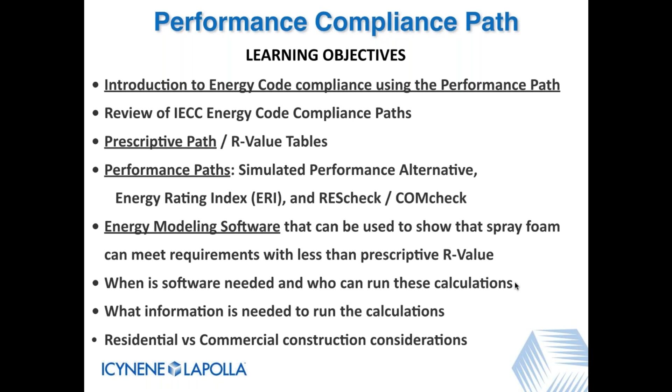And then at the very end, we'll just look at residential versus commercial construction considerations as far as performance evaluation and those type of things. So that's where we're heading today. All right, so let's get started.

This is all about a legal way to meet energy code requirements at R values lower than the prescriptive values. And all we mean by legally is that there is a code compliance path to do that. It's not a matter of, gee, I think R20 is good enough, let's just do that. But this gives us a code compliant method to do that.

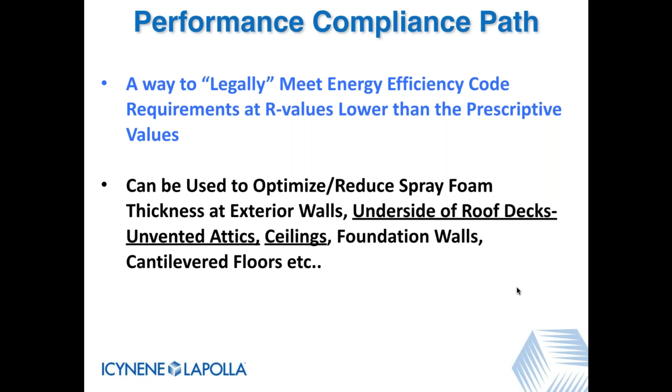And it's very clear in the codes, which I'll explain as we go along. The performance path can be used to optimize or reduce spray foam thickness at exterior walls, primarily underside of roof decks and unvented attics and ceilings. That's where the high R values are. Foundation walls, cantilevered floors, and so forth. So we can look at doing trade-offs based on the air tightness that the spray foam gives us for the overall performance of the building.

All right, so one of the things I want to get started with is I get a lot of calls, or I get these type of conversations that the code officials are told that R20 spray foam performs the same as R38. That is not true from an R value standpoint. That chart, although I wish it was there, does not exist currently.

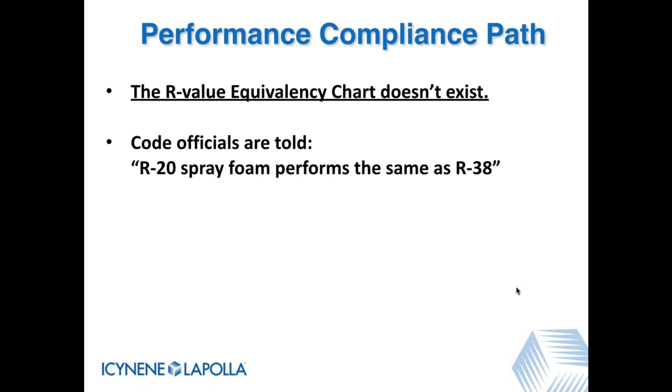And the reason for that is R value is R value. It's based on a specific test, ASTM C518, which is the standard test method for steady state thermal transmission properties, or as many of us in our field call it, the guarded hot box. That's what it's based on.

The key thing to note about when they're looking at this test and running the various products through it, the test does not account for air leakage. So we, in the spray foam industry, the air tightness industry, do not get any credit for the air leakage, the enhanced performance that building air tightness gives us. So again, R value is R value. We have to prove that through these various methods under performance. So that's a big part of what we're heading for today.

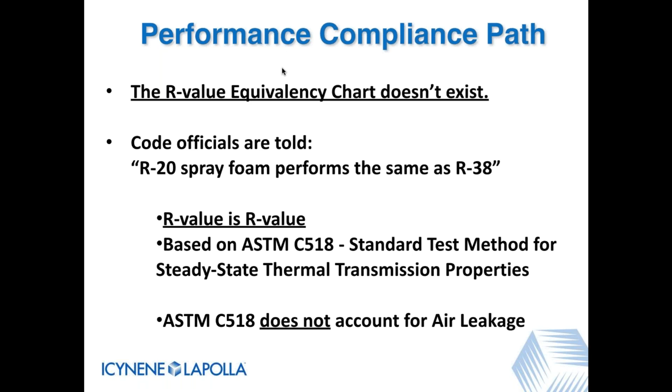Couple things, the IRC Chapter 11 and the IECC Chapter 4 are really the same documents. They came together in the 09 code. They were different charts and different R values, which was a real problem in the code. So anytime we're talking about the IRC Chapter 11 or the IECC Chapter 4, they're essentially identical sections. They're just different code bodies. So that's an important thing to look at.

So now we're going to kind of compare them. What's been happening? The 2009 codes took a jump, about 15% more stringent than the 2006. Basically what happened in 2006 is the Department of Energy decided to come up with this 50% rule where they were going to try to reduce the energy consumption of buildings based on the 06 code by the year 2015, that it would be 50% less energy needed. So that was the goal.

So the codes have progressed along 2012, 15, and 18. They're about 30% more stringent than 2006. So we're not at the 50% solution is what it was called, but we're getting there. And we'll kind of go through the prescriptive charts in just a moment so we can see how that works.

Now, the other thing that's really important is when you look at the IRC Chapter 11, the IECC Chapter 4, those are model codes. That's what the DOE and ICC puts out saying, okay, this is the template, this is where we start. Then what happens is that model code is brought into the state and local jurisdictions, and it goes through a committee process and politics and different things. So typically the model code is almost never adopted exactly the same as the model code. So the state code and local codes are different.

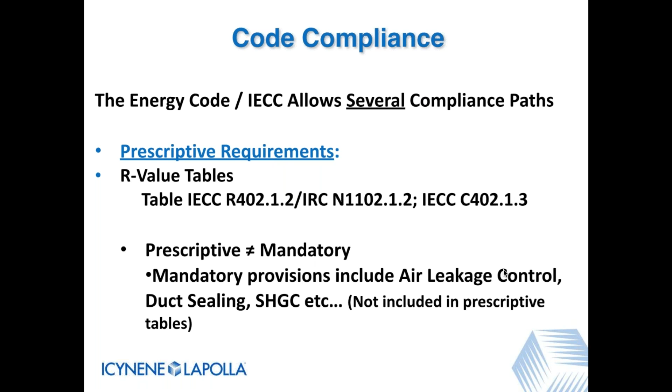Each state will have maybe a different set of numbers, but there will be a table for prescriptive requirements. The other thing to note is prescriptive requirements don't exactly line up with the mandatory provisions, which are not on the prescriptive tables - things like air leakage control, duct sealing, solar heat gain coefficient for windows, etc. There's a whole list of mandatory things that have to be met in addition to prescriptive, and that's important. Just because you meet the prescriptive requirements doesn't mean you're in compliance, especially in terms of air leakage control.

Right now we still have 2 states on the 06 code, and 8 states either have an older code or no statewide code at all. So that's just kind of a jump on that. That's where that characteristic comes in.

Spray foam house - we know that a 1.5 ACH50 house, the energy performance is far superior compared to a conventional fiberglass house that is around 10 ACH50, very loose, back in '06. That's about what we saw as sort of an average, and it's due to the increased air tightness, not so much the R value, but the air tightness.

In the 06 code, mechanical system trade-offs are allowed in the performance compliance path. We'll look at that a little bit later, but it just means that back then, if you put in a higher efficiency HVAC system, you actually got credit for it, and you could trade that off for R values, i.e. lowering R values. The other important thing is that 2006 is the base code level for future revisions of the code. So everything started with 06, and then we start ramping the codes, getting more energy efficient.

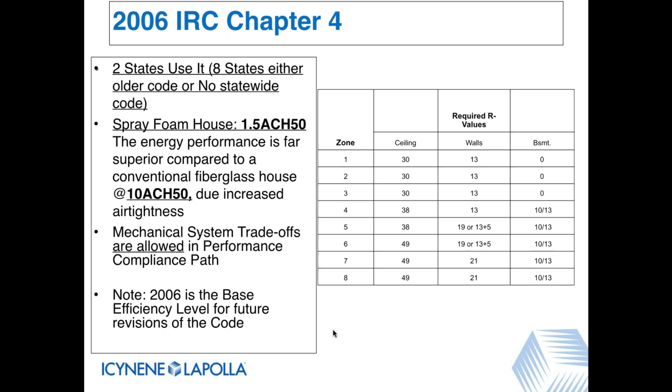So 2009, Chapter 11, under the IRC, or IECC Chapter 4. Again, basically the same documents, just in different code bodies.

14 states are currently on the 2009 code, which called for a 7 ACH 50. We know a 1.5 is still performing much better, so we had some good trade-offs based on air tightness. Back in '09, and in some codes still currently, a blower door or a visual inspection was allowed to determine if they hit the 7 ACH 50.

Visual inspections were there sort of to placate everybody. People were afraid of blower doors. They were expensive, they didn't understand them. They thought they were $900 to $1,000 a piece, which they are not. They're typically $250, maybe $300, depending on location. So visual inspection was allowed.

So you had your option. You could go around and look at it once or twice during the construction process and with a magic wand say, okay, it meets a 7 ACH 50. Not very empirically correct, but it was allowed.

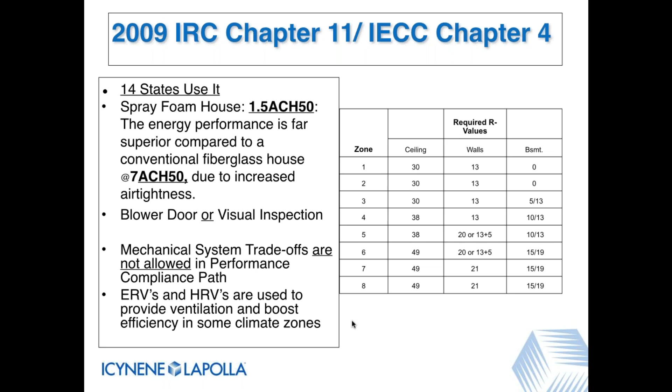Mechanical system trade-offs now are not allowed in the 09 and today's codes in the performance compliance path. ERVs and HRVs are used to provide ventilation and boost efficiency in some climate zones where appropriate. There was no mandate for mechanical ventilation in the 09 code.

Then we get to the 12 code. We start changing things — 8 states currently use it. Air tightness levels lowered or decreased. We had 2 numbers really to work with between zones 1 through 8. The warmer zones were at 5 ACH 50. As we got into the more northern climates, 4 through 8, it was 3 ACH 50.

Blower doors were then required on all houses. Again, that's model code, not necessarily state. We still have some state codes on the 12 and 15 that are not mandating blower doors. So again, check to see what that regulation is.

R-values definitely increased. You can see these here, especially in the ceiling, going from an R38 — I think it was climate zones 4 and 5. We also had the walls increasing from 13 to 20, or 13 plus 5, that is cavity plus continuous on the outside.

Spray foam, at this point, since the requirement for air tightness made fairly tight buildings — not super tight, but pretty tight — it's all about, let's use spray foam because we can get there quicker. Time and detail, i.e. money, was required, so it put us in a much more competitive stance versus a fiberglass house that had to do a lot of extra air sealing to get down to these lower levels.

Mechanical system trade-offs still are not allowed. At this point, mechanical ventilation is required. The key number is 5 ACH 50. The code doesn't actually label that, but because the loosest building under this code was a 5, and this code required mechanical ventilation, that really meant 5 is sort of the line in the sand — if you got tighter than, or up to 5 or tighter, then mechanical ventilation was required. So it depends on what zone you're in, and again, what state and local jurisdiction accepted that and what they had in their books.

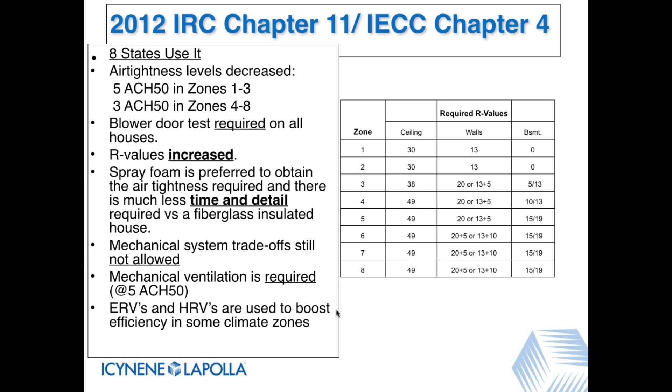ERVs and HRVs were used to boost efficiency in some climate zones, again as part of the overall system. With the 15 code, we've got 17 states using it, same air tightness levels, pretty much required in all houses. That's good. Our R-values did not increase — that's also good. Spray foam, again, preferred because of the time and detail, that's the cost effect required by fiberglass houses to get them anywhere near a 5 or a 3. Mechanical systems still aren't allowed, and mechanical ventilation is required.

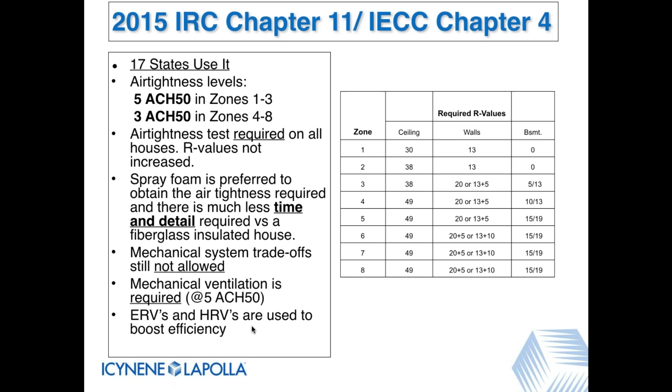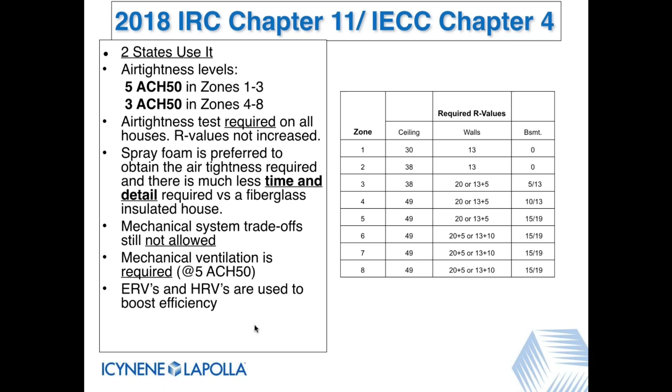ERVs and HRVs are all part of the house as a system. In the 2018 code, not a whole lot of changes. There are 2 states using it — I think it might be 3 now. I couldn't get that confirmed, but as states go on, we're going to be seeing more on the 18 code. It doesn't change a lot from the 15, and that's a good thing.

So, the performance path. It gives us the option under these sections, i.e. section R405 or N1105, which is known as the simulated performance alternative. This is another way to go about it. If you meet these requirements, the building complies with the energy code.

Okay, so the main part of this section is right here. Proposed design shall be shown to have an annual energy cost that is less than or equal to the standard reference design. The standard reference design is a building based on the prescriptive tables N1102.1.2, R402.1.2.

So you run the proposed design, that's the spray foam house with the tighter envelope, through the simulated performance alternative. And if indeed the energy cost is less than or equal to the standard reference design, that is the prescriptive house, then you're good to go.

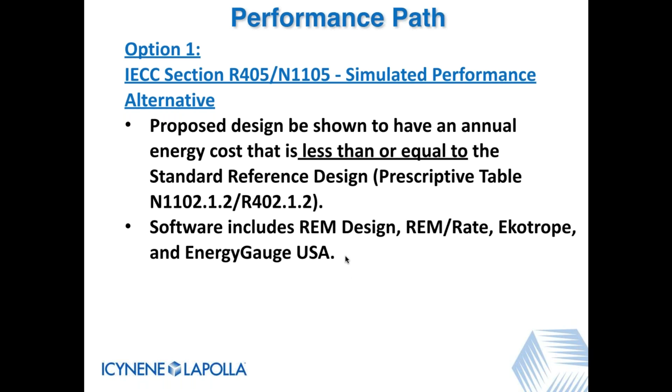There's a lot of different softwares out there. One is REM Design, there's another one, REM Rate, there's Ekotrope, and there's Energy Gauge USA. So those are 4 programs that pretty much universally are accepted. Not in all cases, but for the most part, we do see acceptance by the code officials.

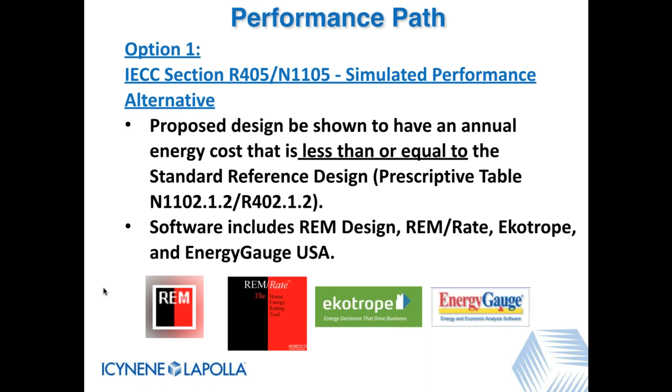They're familiar with it. As most of us know, especially in remote areas, some of the code officials are not quite understanding performance path and computer programs and so forth, but it's getting better. These do comply with the requirements set out under the DOE and the ICC as far as programs that can be used to show compliance under the simulated performance alternative.

Okay, so here's what we're going to talk about, and this is really where it boils down. The computer modeling accounts for the spray foam's lower building air tightness, so its benefit can be realized. So it does factor into the calculations. That's very good, that's very important.

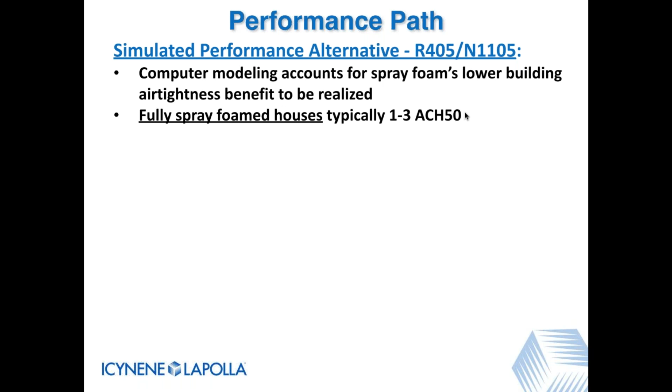And we know that spray foam houses typically come in around 1 to 3 ACH50. Those are homes that have either 6 sides of foam or maybe a slab on grade with walls and ceilings foamed. So we know that's very doable.

Unvented only applications, say in a retrofit, or if the builder or designer decide just to do an unvented attic to keep the ductwork inside the building but use conventional insulation in the rest of the house, then we see roughly around 3 ACH50. It does vary, but certainly it still can be a very tight building, especially adding in that unvented attic assembly.

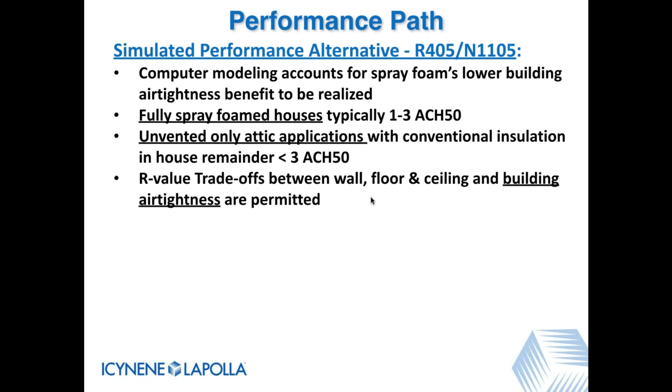R-value trade-offs between wall, floor, and ceiling and building air tightness are permitted. So if we have a tighter building, we can lower the R-value in some of these components, as long as the energy cost is the same or equal to the prescriptive design.

Mandatory energy requirements still apply, so you don't get away from that. This is the other part, and there's a whole list of them, I think we'll show that on one of the slides, the type of things that are mandatory, but they're important, so they all have to be met. This is a biggie.

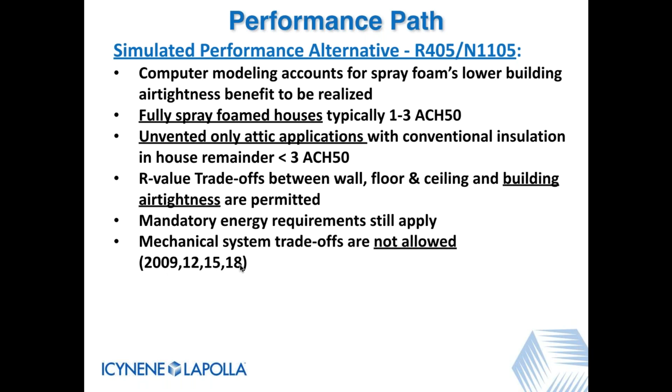Mechanical system trade-offs, as I've said before, are not allowed from the 9 through the 18, including now the 21, which is still in progress. So you can't use a higher efficiency furnace or air conditioning system and get credit for it as a trade-off. The reason for that, it's kind of a goofy thing, but there's a prevailing minimum federal HVAC efficiency in the books. And so the codes are not allowed to require anything above those.

I think the AFUE, as far as furnace efficiency and boiler efficiency, is 81, and I think SEER is 13. So what it means is that you put the same efficiency for the standard reference design and the proposed design, so there's no credit allowed. It becomes a level playing field. So keep that in mind.

That's one of the things about performance. Even though the builder is going to use a very high efficiency piece of equipment, there isn't any energy credit given for that in this particular approach.

One of the things that is needed, builder certification, is typically required. In other words, the builder goes back out after the house is built, looks at the building, makes sure that it complies with everything on the alternative that was designed, and signs it off. So there's a liability transfer to the builder saying, yep, we did all of those things. We should be in compliance, and for the most part that's what the building code officials want to see, and that makes it work for everybody.

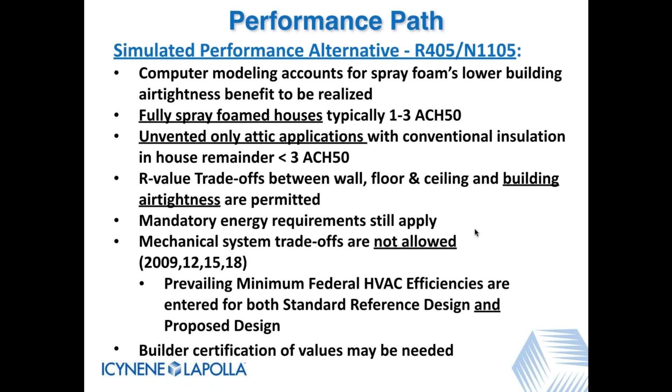All right, so performance path, we need a lot of info. It's a very detailed thing. I've done quite a few of these. In my earlier life, I did hundreds of these as an energy rater back in the 80s, and it's pretty detailed, takes a lot of time, but that's a good thing. It's a complete construction set of drawings and project specs.

Elevations, floor plans, there's a takeoff on the building envelope areas, making sure that, you know, in R value for the walls, we get all of the wall R value, and making sure you've got everything that's accounted for in the plan. So the plans, the complete part is very important. Proposed insulation levels of each component, floor, walls, and ceiling. Predicted building air tightness, this is what you're shooting for.

So if we're going to run a 2 ACH50, a very tight building under the blower door test at 50 pascals, then it's a big part of that calculation. Fenestration specs, U factor, solar heat gain coefficient, etc. Those are part of it.

Project orientation, how it's facing, north, south, east, or west on the particular building, or if it's in a development, it's the worst case. Typically where the most amount of windows face north, and as long on this proposed design, and if indeed it passes that, then the building code official knows that the other orientations are going to be better. So there's sort of a do one rating, make sure the buildings are all the same, if you may, but that orientation is a big deal when it comes to looking at performance calculations.

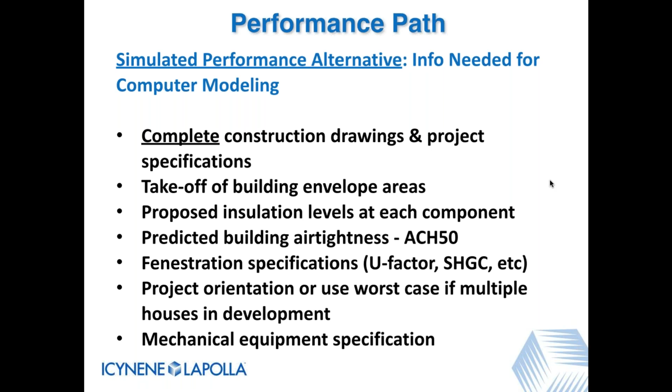You do have to put in the mechanical equipment, that's part of the equation, but again, with this particular path, there really isn't any credit for it as far as the calculation behind it. It is entered, but it is not credited. So here we have a computer modeling to demonstrate the path. This was done, I think, back in '18. This particular building's in Albany, New York, which I think is climate zone 5A.

And this is the mandatory requirements that we talked about. These are the things that have to be done regardless of the R values. And as far as compliance, the things they look at are heating, cooling, and water heating. This is where the line is. So as designed, this would be the spray foam home. This would be standard reference design. As long as this number, 1729, is less than 1804, which it is, then this house would comply.

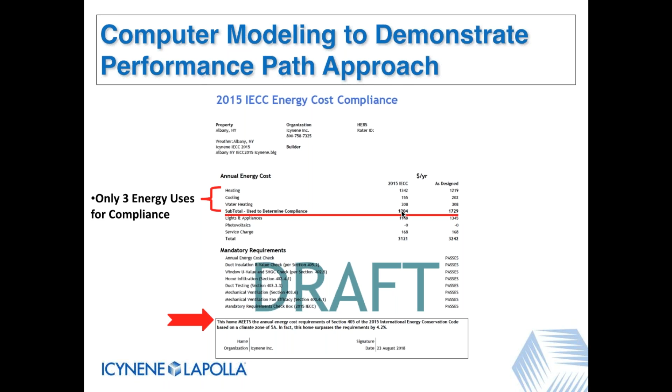There's another one that I got in from Performance the other day. It's a group we work with out of North Carolina for computer modeling and home energy ratings and a lot of other things that we look for. This particular home, walls were R13, roof R20, and this was a 2 ACH50 house. Pretty tight house, which is good. And again, you can see sort of small, but the subtotal used for compliance, this number, 1001, is less than the other by just a little bit, 1005. But that's all the code requires, equal to or less than.

And then this is the statement you're looking for. Design exceeds requirements for the North Carolina 2018 performance compliance by 0.4%. It can be 0% as long as it's the same. And these are the requirements that are needing to be met. So someone needs to check all of these off and make sure that in addition to the R value requirements and the air tightness requirement, other things need to be met.

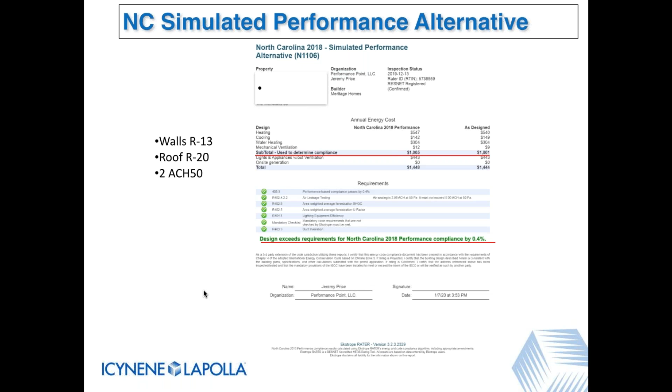And this is done in a program called Ekotrope Rater. It's a web-based rating system that's out there. It's fairly new. It's one I've been trained on, both REM/Rate and Ekotrope Rater, and they seem to give you pretty similar results. Now, one of the issues that we have to kind of look through is, okay, great, now we need to do this. How do we find someone who can do this type of calculation work?

The first one we would call on would be a RESNET rater, which is a HERS rater. There's the RESNET network that you can Google. It has a finder, a locator of where the RESNET raters are based on location. So you can contact them, find out if they do it. I always think it's a good idea for our dealers to team up with various RESNET raters, work as a team. You provide them some work, if you may, and back to you from them. So it's a good relationship, and a lot of our dealers do use HERS raters for the compliance path.

Now they can either run, as we'll see in a minute, a home energy rating, or they can do the performance calculations under simulated performance. Not all of them do both. Some do, many do. It makes sense that they're a multifaceted company. Then you also have, separate of that, building envelope consultants. These are just companies that specifically work on building envelopes, or energy consultants.

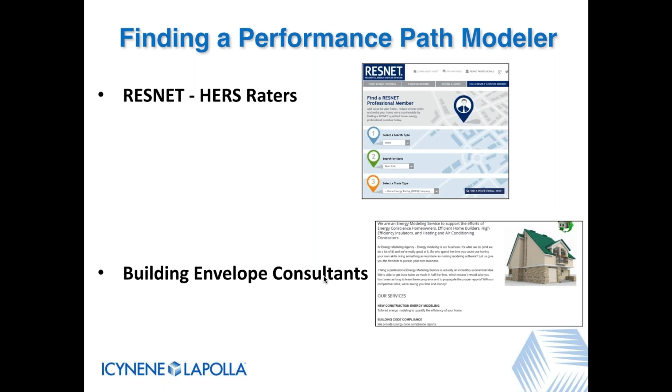You can Google either one of those for your area and find out who might be available to do that kind of work. So as far as finding one, these are just a couple I put up that we're aware of.

That's an assistance for the builder, and something that I think, because we're definitely in the energy business, we should be able to have some information. So these are things, as you look at using a performance path to comply with the code versus prescriptive, these are companies that can run those calculations based on code compliance.

Another opportunity or option is the state code energy offices. They have a list of companies. Typically, you kind of have to dig down into their website. Sometimes it's difficult, or you can just hopefully contact them through an email and tell them what you're looking for. And typically they'll have a list of companies now, and it's getting better and better, of who does these calculations. So there's another avenue to find out what's happening.

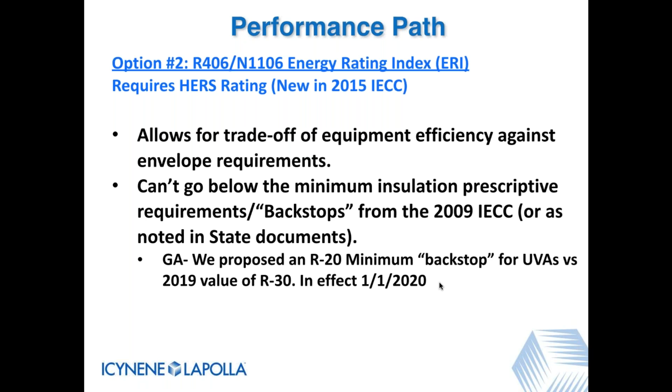In Georgia, when they were going through their code, now in effect as of 1/1/20, we proposed and were successful at pushing through an R20 minimum backstop for an unvented attic or cathedral ceiling, versus the 2019 value of R30. Our dealers said, well, we don't want to go to an R30, what do we do? So we got it through the code. It's about a year-long process with many meetings and a lot of politics, everybody fighting on their side of the equation or not. But we did get it through Georgia, and that's now in effect as of 10 days ago. So that's a good thing.

North Carolina has basically the same code change proposal. Right now it's passed all the committees and is going through what they call financial impact review. I believe we'll be fine with that, but we've gone through all of the politics already. Now it's a matter of people crunching the numbers to see how that affects the overall building and the homeowner, since everything out there is meant to protect the homeowner and building owner to make sure they have an energy efficient building. So Georgia, North Carolina, and hopefully some other states we can get there too. We dropped that backstop from an R30 down to R20, and the same thing in North Carolina. That's good news for our dealers, it makes us more competitive versus typical fiberglass or cellulose projects we're looking at.

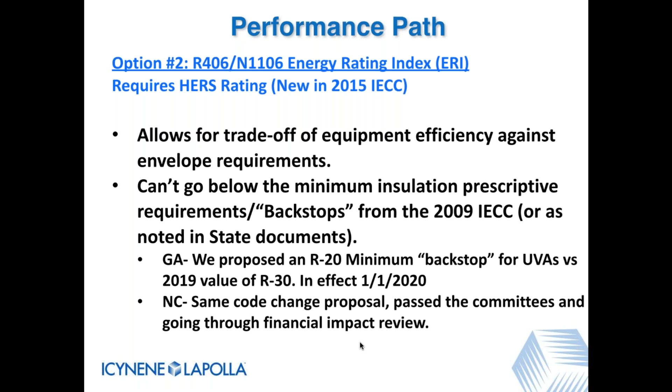So the ERI, or HERS rating, requires a detailed energy rating be performed. The energy rating can be done from plans, that's called proposed. So before you even start, you can do an energy rating and tweak the numbers to make sure you get it below that threshold number. I'll talk about that in a minute, the actual index and what it means. But it's required to be third-party verified, which is where the HERS rater comes in.

So you do it proposed, then go ahead and build it. If everything comes out right, especially the air tightness, it has to be verified by a third party, so there's a blower door test and a duct blaster test if needed. Duct testing is not needed if we have an unvented attic, because in that case the ducts are inside the envelope.

That's another little bit of a cost trade-off that's not required with an unvented attic, which is a good thing for us. So again, that's the most important thing proposed. As you go into the project, the design comes in, you know it's going to pass as long as all the air tightness is there and all the other components.

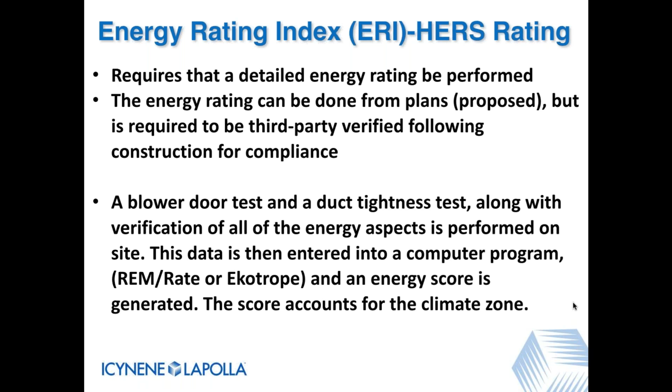And then the HERS rater will again do a post-construction compliance rating, and as long as it meets all of the conditions, you're good to go. The data is then entered into a computer program, again it can be REM Rate or Ekotrope right now. Those are the two main programs used by HERS raters, and there's a variation of both. Some use one, some use both, some use the other. An energy score is generated, and the score does account for the climate zone, so the different climate zone numbers and different ratings.

So here's where it kind of fits in. Just so you understand where the path is, the numbers: a score of 100 means that the house used the same amount of energy as a house built in 2006 under the IECC. So 100, no change - none of the states have adopted a score of 100 for compliance. And then the other end of the spectrum, a score of 0 would be a net zero house. You probably hear a lot about net zero houses, typically with a solar panel to make up for the energy that you have to use for most of your electrical.

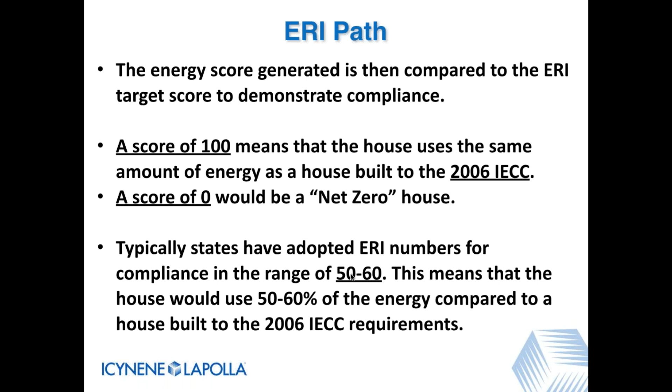So 0 to 100, that's the range. And what we know is that the states typically adopt a number. There are numbers in the model code based on each of the climate zones. However, the state itself, which I've gone through many times, will adopt some other number. Most of them are in the range of 50 to 60 as far as the index number. The name of the game is to get the index below whatever number is stated. So if it's 50 or 60, it means the house would use between 50 and 60% of the energy compared to a house built under the 06 IECC requirements. So that's really kind of how it fits in - 0 is extremely energy efficient, 100 is basically the same as 2006. So if you're going to use the ERI path, it's important to get below whatever that state or local jurisdiction has adopted for the index.

So which performance path do you want to use? What's the most advantageous to achieve energy code compliance? It really depends on the state ERI rating values, where they stand - is it easy to get to that number, or is it very difficult? And if mechanical equipment trade-offs are desired - so if you know your builder or the building is going to put in a 90% or 92% furnace and 21 SEER efficiency equipment on the cooling, then there's a good chance this will work. But you have to take that into account because you have options.

As this rolled out since the 015 code started being adopted in 16 and 17, they found achieving the ERI ratings is actually a little harder than prescriptive. So at this point, not a lot of people are using the ERI path, although it's out there - it's an option, depends on your climate and a lot of other factors. It's something you can sit down and talk to the energy consultant about and get a take on what they feel is the best approach to take as far as the energy modeling.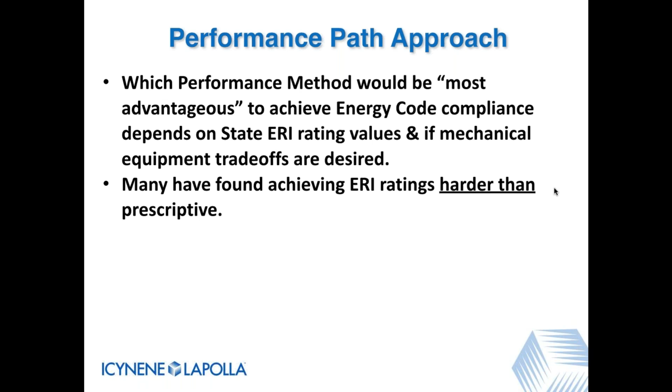We know that the simulated performance alternative, typically REM Design, is what we've used for a number of years - probably upwards of 15 or 20 years - and it's worked very well for us because the algorithm of the calculation does give the right amount of credit for an airtight building. So simulated performance alternative, option one, generally works best for us. ERI can work, but it just depends on a lot of different factors - again, that's a discussion to have with the energy consultant.

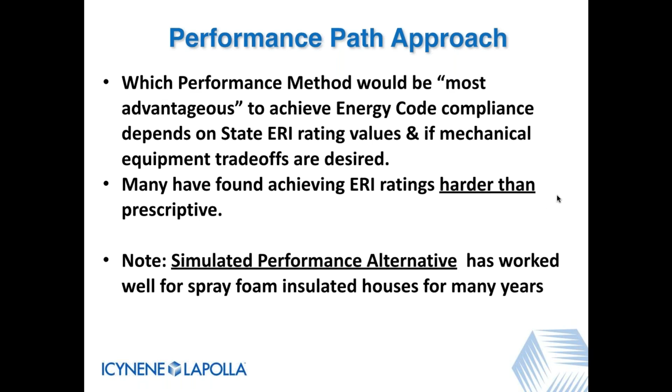Okay, so computer modeling approach is one of the performance-based compliances on the commercial side now. This is the difference - we'll just look at commercial briefly. It's pretty similar to residential, but here's where the issue comes in - there's a couple of them. The inexpensive, easy to use, comprehensive software for commercial buildings just isn't available. Commercial buildings, as most of you know, are much more complicated than residential - you've got your interior loads, a lot of different things come about, a couple other things that play into that.

So you do need to use a very comprehensive tool, but they're expensive, hard to use, or take a lot of time to understand. There's a big learning curve, and they cost somewhere between $4,000 and $9,000 for the consulting company to produce an energy model in roughly 2 or 3 weeks. It really just depends on how busy they are, but that can be a big delay, especially when you're trying to get started with the project, or the engineer or architect is. So that's kind of the rub here.

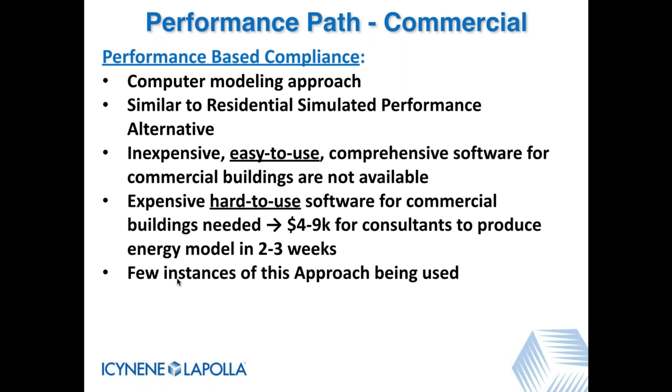The other part that's kind of tough is, one, we see few instances, mainly because of the expense and the cost to run them. Commercial building airtightness is unknown oftentimes. It's difficult to quantify due to multi-use, say the first level is commercial, and then above that is residential or mixed use building.

And it mainly comes down to something called compartmentalization. All that means is that inside of the building, each of those zones, say a retail store A, 1B, 1C, the energy loss or air leakage between the building separation walls really doesn't matter from an energy standpoint. All you're really looking for is the air leakage to the outside.

So in order to do these energy blower door tests, what you have to have are multiple blower doors that are all synced together. So yes, they can be done, but they typically are not done very often.

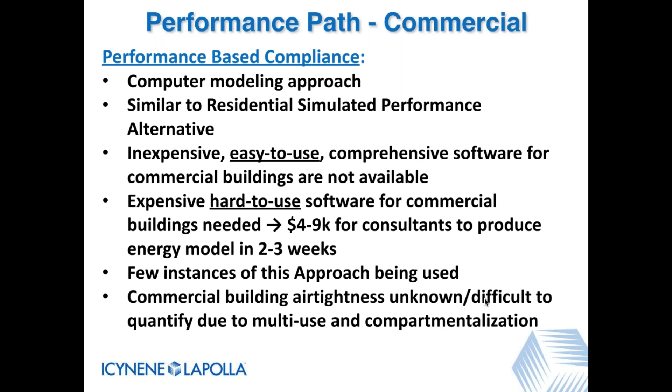So commercially, it's available, but there's a pretty good price tag to pay, and trying to come up with the actual air tightness can also become pretty darn difficult, and unfortunately can be expensive. If you find a company with 5 or 6 or 8, whatever it takes, blower doors to equalize the pressure between the various compartments and then find the difference to the outside, that becomes a bit of a stumbling block.